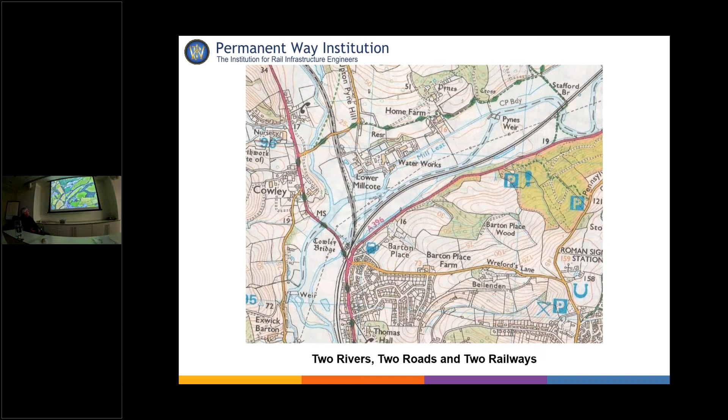In more detail, that's what we have at the moment. We have the River Exe coming down from the northwest, following the Great Western Main Line, originally the Bristol and Exeter, coming down to Cowley Bridge Junction. There's the Tarka line, coming down from Crediton and Okehampton, and then the corresponding roads which were there long before the railways, one from Crediton and the other from Stoke Canon, coming down to all meet at the famous Cowley Bridge Junction.

Present day, you have the two rivers: the River Exe, which comes down and goes through the bridge at the junction, and then the River Creedy, which comes down from Crediton down the Creedy Valley.

I was interested, it's a bit fuzzy I'm afraid on this screen, where the rivers actually ran. So I looked back at some of the old OS maps and realised that in fact the administrative boundary follows what used to be the line of the river, which is a big clue really. So I thought, well, what can I find earlier than that?

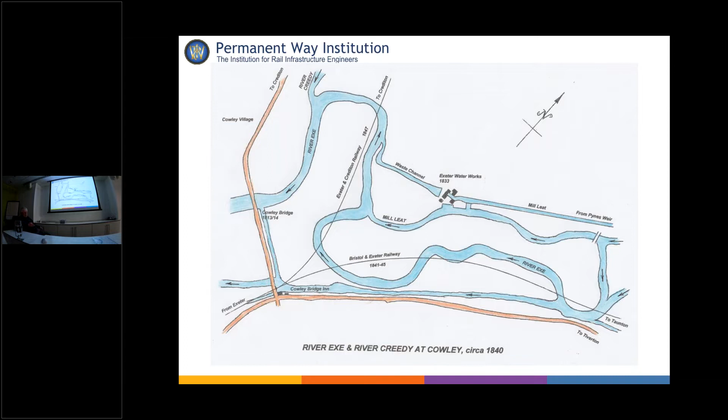You can still see, when there's a flood, where those watercourses used to run very, very clearly. These different sort of channels are clear there. They simply mimic the original courses of the rivers.

Along came the Bristol and Exeter Railway, and that was where they straightened the river, which is alleged to be the problem with all the central flooding. But there were still these bits running across floodplain over to the River Creedy, which was the original confluence, actually, the Exe and the Creedy.

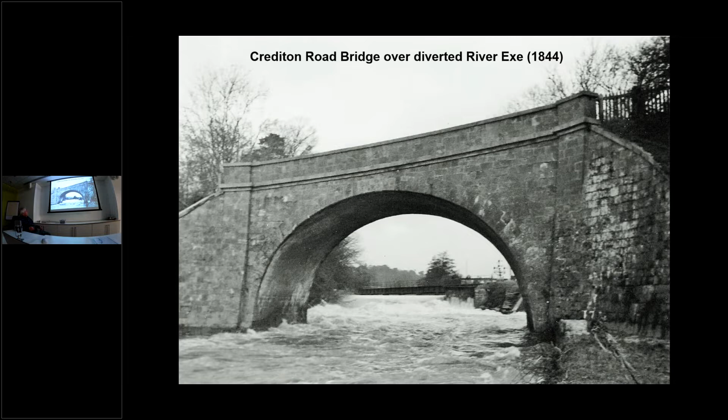Well, the next one was the Exeter and Crediton Railway. This is where it becomes really a Gilbert and Sullivan opera, with the shenanigans that went on. It was built as a broad gauge double line in 1847. There's no connection to the Bristol and Exeter Railway because they couldn't get any lease agreed.

The LSWR turned in, joined in the fray by putting in a whole load of directors, and they decided to convert it to standard gauge, hoping to connect it to their new line coming down to Exeter. Then the Gauge Commissioner said they couldn't use it as a standard gauge line because it had been authorised as a broad gauge line.

So they decided they would build a temporary station at Cowley Bridge.

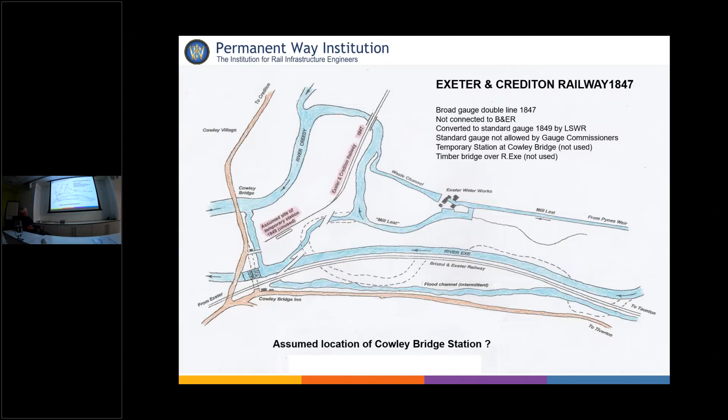When we were preparing this presentation and the video that follows it, we assumed, as I said, it was going to be in Cowley Meadows, that it would be somewhere here, possibly. We thought, well, Cowley Meadows, that's the Tarka line there. The junction's down here. We thought, well, they'd probably put it here with a nice little access here. Plus this cottage, that might be part of the station building.

But no, it wasn't, apparently. That was a new toll house that was built after the road was diverted to go over the top of the Bristol and Exeter line.

So that was the situation, but in fact, it was never used. Eventually, the Bristol and Exeter came to an agreement with the Exeter and Crediton Railway for a lease, and we finished up with the whole thing being abandoned.

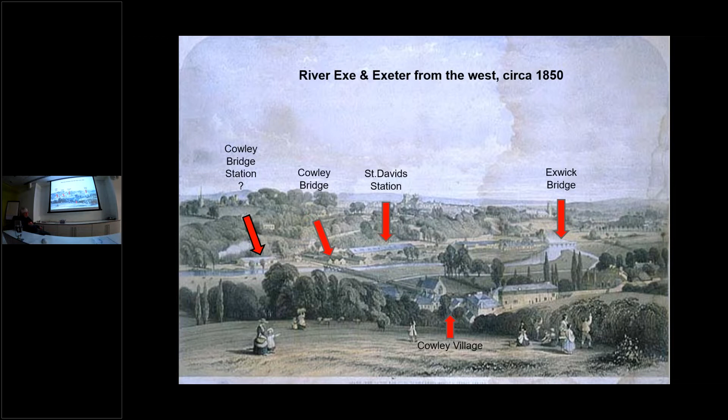And the scene isn't very different even today. So he got it more or less right.

So the Cowley Bridge booking office was taken down, but they reused it, re-erected it at a new site apparently. It was burnt down later.

So eventually, it was leased to the Bristol and Exeter. One track was converted back to broad gauge, and a junction was opened to the Bristol and Exeter Railway, initially with only one track. There was originally a timber bridge built over the River Exe, but that had become a bit decrepit. So that was then replaced with a single line bridge. It's bizarre, all this. Rather than the double line bridge.

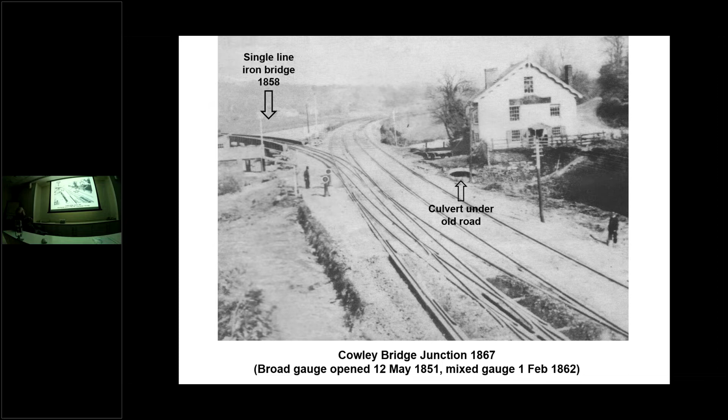There were inevitably derailments and some interesting inspectors' reports about the junction being too sharp. But eventually they got around to adding another track to the bridge and a full proper mixed gauge junction so that the LSWR could run through from Queen Street Station.

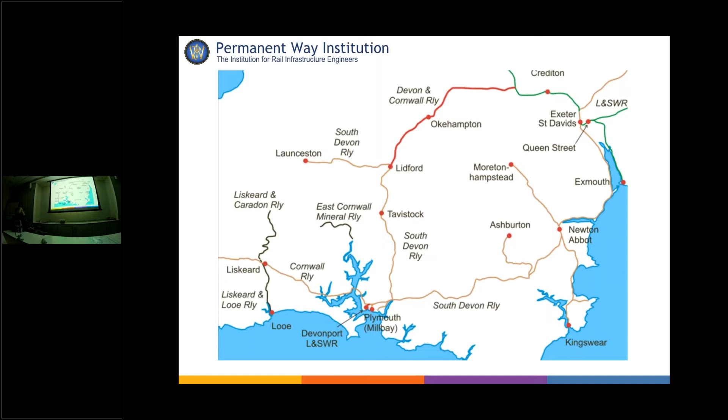And that's another rather funny photograph, a different view of the double line bridge as it was eventually finished, having been strengthened with extra trestles put underneath it. So in the end they got there, got to Crediton in mixed gauge days, and later the North Devon Line to Plymouth opened all the way through - that's where we finished with the general layout of the lines in North East Devon.

But now flooding problems - the London Evening News reported on serious flooding at Cowley and washouts at the junction. So it's quite interesting that here, presumably after the flood, you've got a P-way gang here.

Relaying track, chaps doing something about the embankment, a relaying train, perhaps very primitive - quite an interesting picture. But unfortunately the artist wasn't very good at representing the single line bridge over the floodplain here, it looks more like a fence. And it looks like the landowners planted some nice little trees, with fences round against the rabbits. A lovely picture.

But the problem was that the only outlet for water coming down on the right-hand side of the line was this small culvert, which the Bristol and Exeter had built just north of the junction, an 8-foot span, still there of course. And that's all there was to relieve the flooding, which was mainly overtopping the railway up the line, coming down this side.

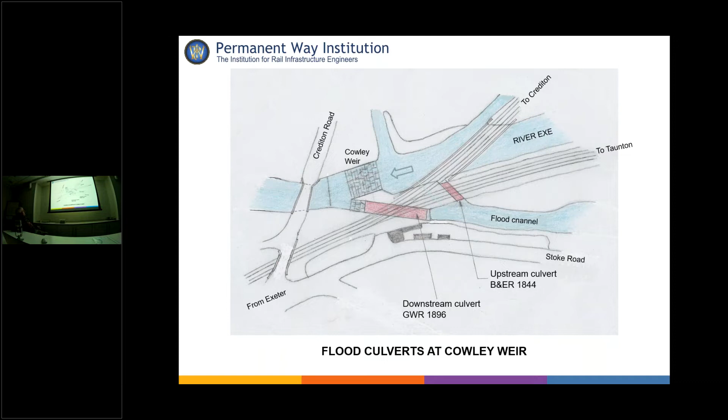This little old small flood culvert here coming out under the bridge of the line to Crediton, but an extra one had been added in 1896 by the Great Western to try to get the water away more quickly - that's known as the downstream culvert. The old one was the upstream culvert, and Mark very kindly provided me with a photograph actually inside the downstream culvert, which was a lot bigger than the old culvert.

So those were the typical 20th century winter flood conditions, which continued right the way through from that 1896 extra culvert, and that was still pertaining at the beginning of the 60s.

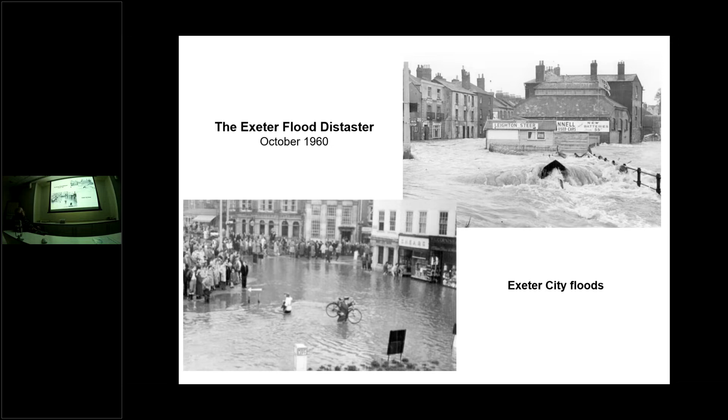But then October 1960, there was the Exeter flood disaster. It really was horrendous - this is the state things were in the centre of Exeter. That was the flooding downstream from Cowley. It was just a complete ocean.

A report was commissioned from MacDonald and Partners by the Devon River Board to report on what could be done to alleviate the flooding. Part of that was proposals for realigning the River Exe at Cowley, and various options were considered.

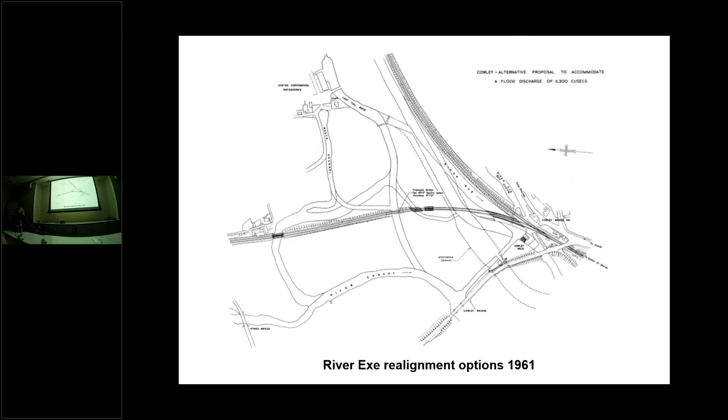I won't go into detail, but there were alternatives. That was the one eventually adopted, with the Exe alongside the railway diverging away from the railway, but back under the original course.

Sorry, I'm pressing the wrong button here again. I've done it again. I've done something silly with the buttons. Sorry Philip - that's all right, don't worry. There's all this technology. All right, do that, and that should be started. All right, okay.

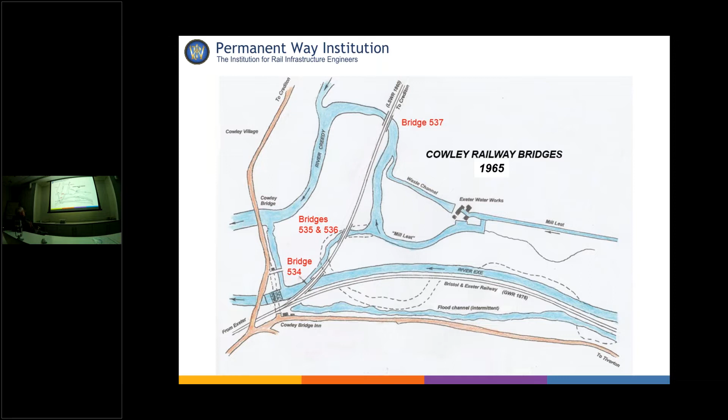So that's where we were by 1965. We had double line bridges from the junction, Bridge 534, the old long wrought iron bridge, and all these other various bridges which were getting very ancient. So it was decided

that British Railways would do the work to replace them with new bridges on the alignment proposed in the McDonald report. A new one for the River Exe, filling in the old channels, a new one for the Mill Leet coming from the waterworks, a connecting accommodation bridge, and a balancing channel between the two - a nice new wide channel.

And that is actually what finally - sorry, I've done it again. I keep pressing the wrong bloody button. Just take the slide up on the screen, the forward one. Yeah, right, there you go - go backwards now.

In those days it had become British Railways rather than British Transport Commission. It was Southern Region, so they engaged consultants, Mott Hay Anderson, to carry out the design work, because they didn't do that sort of thing very much in the Southern Region in those days. They invited tenders in early '65, and let a contract for construction to Kier Construction. Then in June, the North Devon lines were transferred to the Western Region.

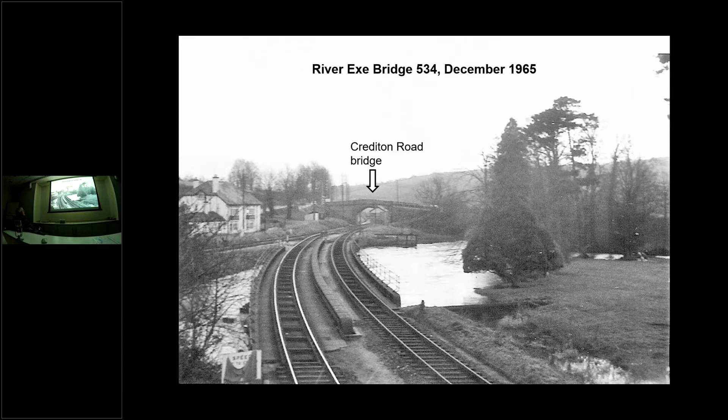The downline had been filled with stone dust to create a contractor's road, and the upline from Crediton to Exeter was singled so that we could carry out the work with just single line working.

Interestingly - have I done it again? No. The original course of the River Exe is actually visible here in this photograph, along with the singled upline and stone dust infill to create a road. The original course of the River Exe here again, snaking around under the bridge.

This is these two bridges - close to this was where the gents' lavatory was. Fortunately, all these bridges were two separate bridges because the line had been doubled at different times, which made it a lot easier for the work to be carried out, being able to demolish one side without affecting the other. Also for infilling, it meant the longitudinal rail bearers could carry the load of the contractor's vehicles and so on.

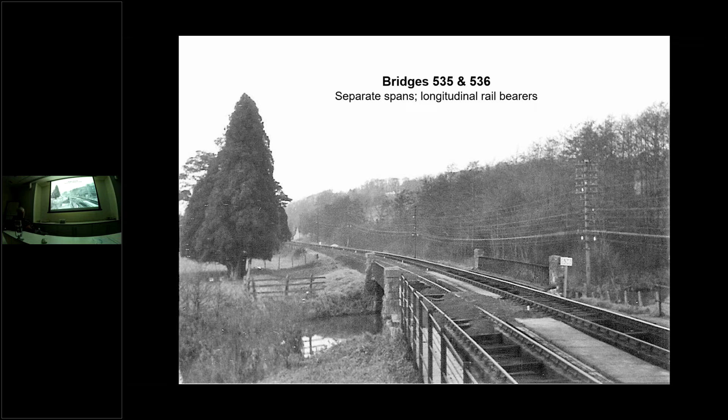That was the one, the furthest north, the Mill Leet. Again, you can see quite clearly before construction there, and also wagons standing on the contractor's siding.

So that was our site. It was over half a mile long, 700 meters, single line, not very easy for major civil engineering works for bridge renewal, but we managed, and it turned out to be quite an interesting job.

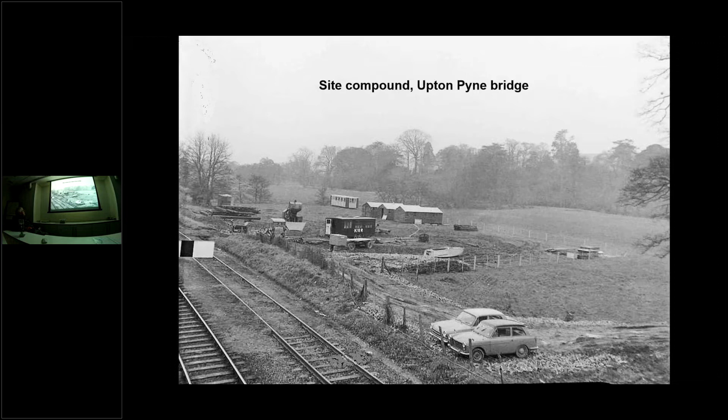That was a contractor's access road, a bit further into the job, got a bit muddy. Oh, and very handy, the Cowley Bridge Inn, we had some temporary accommodation.

The Martin Hayes Clerk of Works decided to negotiate with the landlord to level a piece of ground and create an access off the Stoke Road. A few loads of stone from the contractor and a tracked excavator managed that.

And so he suggested, well, why don't you get a caravan as well, save on lodgings? Strange enough, we both got caravans almost exactly the same. Very convenient. All the facilities were there, you know, loo in the backyard, and yeah, enough said. It looks a bit different today.

So we started eventually in February. Diesel pile hammer, banging in piles, during night possessions - not very acceptable, so there were lots of complaints.

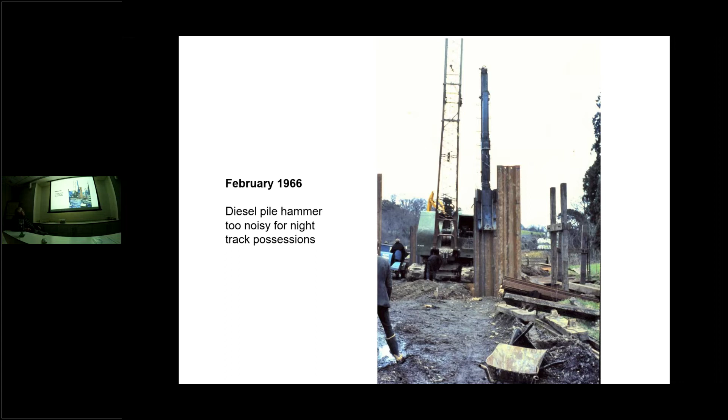So we finished up doing Sunday possessions instead. Some of the piles were so close to the line, we actually had to tip the rails out to get the piles in, pull the sleepers back. That's me there. Then get the track back together and ready for Monday morning.

The cofferdam excavation is going on here. Oh, that's Kier's site engineer - not very interested in the work, I don't think. He's a nice chap though.

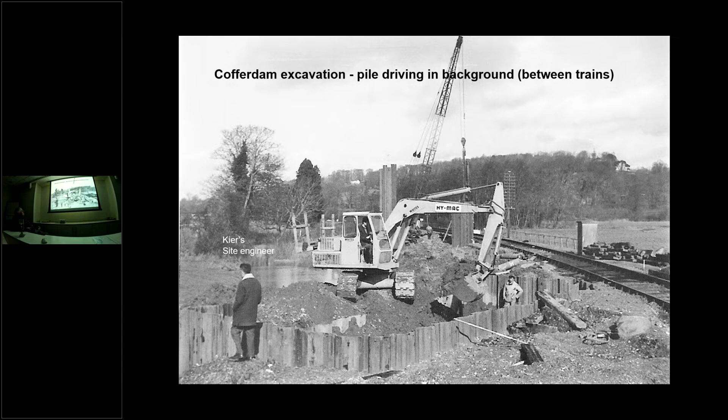The excavation continued with 5 miles an hour working. That's a Plymouth to Brighton service, and there's the excavator busying away. No problems, you know, so everybody's happy. Don't think we'd get away with that these days.

Cofferdams are dug, the strutting and framing in. Then one of the cofferdams got to about 6 meters down, and there's this huge tree trunk, about 1.5 meters in diameter. How long it had been there, how many hundreds of years, I don't know, but it might have been thousands of years. That took 2 or 3 days to cut through and get it out, because every time you cut a slot in it, it closed up because it was expanding.

I don't know what they did with the tree trunk. I'm sure the local archaeologists would have stopped all work for about three weeks to examine it. But anyway, we got the cofferdams completed, some very close to the line, with a passing DMU over the top. It all worked, and nothing fell in.

All the concrete for the job was batched on site. They used no ready mix at all - they set up a proper batching plant and so on for it.

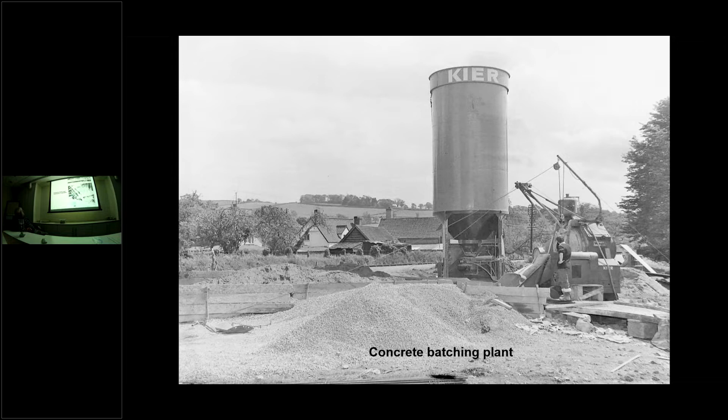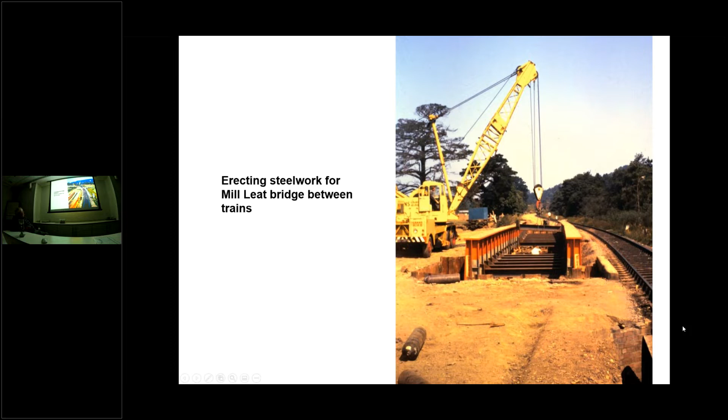The steel was erected between trains, and well, there's a Hymac going past on the ballast train whilst work has paused up on the Mill Leat Bridge.

Keep doing this. What do I do? Yeah.

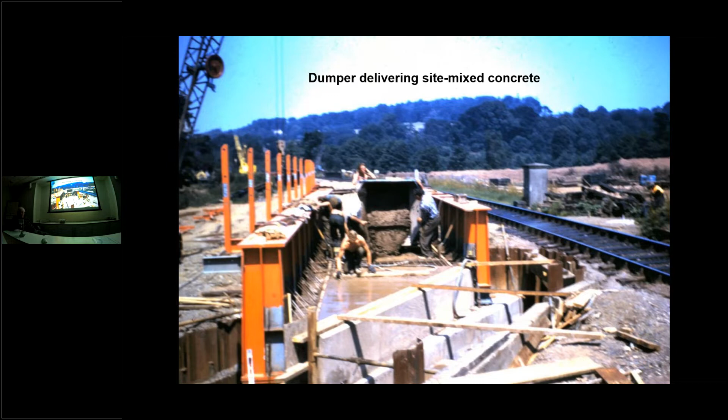Concreting the deck of the River Exe Bridge. Note the PPE, health and safety - nobody got hurt, but it was a lovely sunny day.

Eventually the bridge decks and the formation were ready for track laying. It looks a bit primitive through here, but it was okay. There was a single line turnout laid beyond the Mill Leat Bridge.

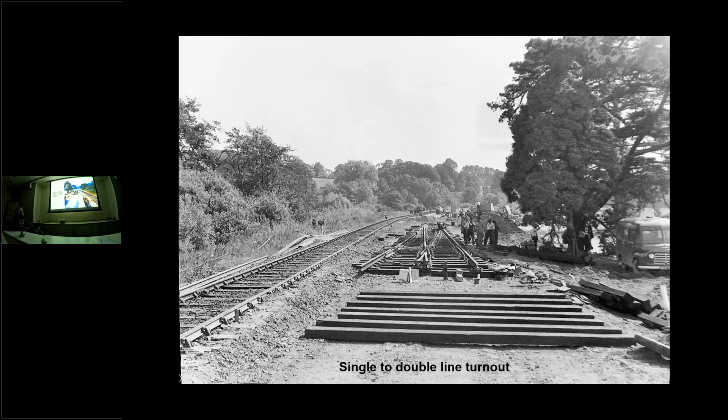Eventually it was connected - initially back into the up line, so that whilst we were finishing the work, trains could continue to come down the single line connection from just beyond the bridge. There was a temporary ground frame beyond Upton Pyne Bridge, where trains went from double to single line working, so they could continue to use the single line and then come back onto the new down line until the work was finished.

So the new track was laid and ballasted, and opened for use. Then we could take out the old up line, which was lifted and got rid of - which, oh, it's quite interesting.

Both bridges were double span, so of course the two spans had to have different skews to suit the track curvature. That was fairly tricky where the joint between the two spans was.

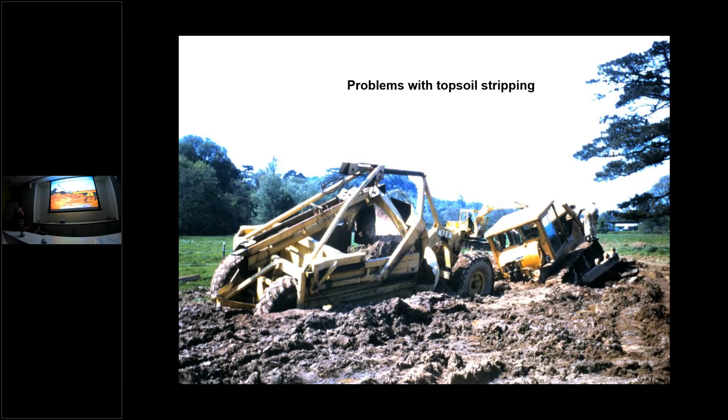But eventually we got around to digging the new channels. The spoil was moved by dragline and carted away by six-wheel drive dumpers. They had to have six-wheel drive because they kept bogging down otherwise.

So we dug out under the bridges, pulled out the sheet piling, and the River Exe channel was dug.

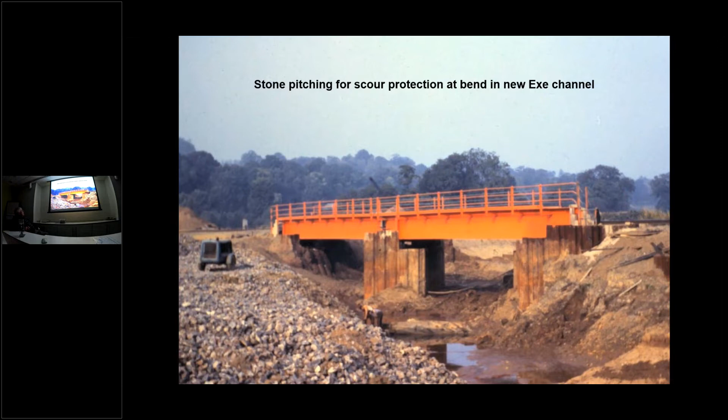Stone pitching was required for the bend in the River Exe to prevent the scour, and that was completed - a nice job, all pitched by hand, as required by the Devon River Authority. They wouldn't tell us what they wanted; they said, well, you do it and we'll approve it. But yeah, typical.

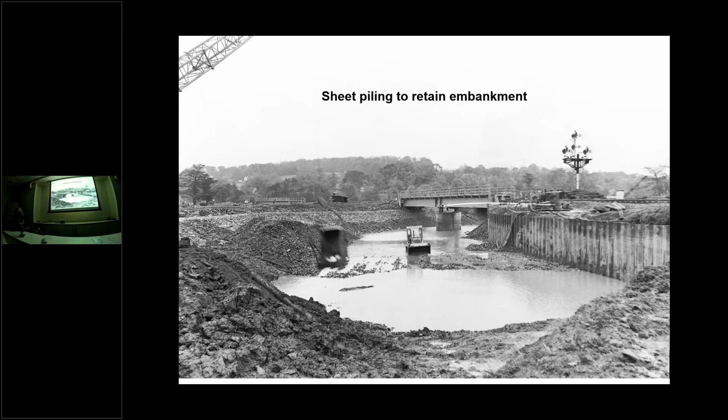Sheet piling was driven to retain the embankment downstream of the bridge. And then there was the problem of the water main.

There were existing twin water mains that ran from the waterworks down to Crediton Road. Unfortunately, the existing mains ran straight across where the new cut for the River Exe was due to be. We were held up because there was a delay on the delivery of the pipes for the water main.

We were very pushed because all the excavated topsoil from the new channels had been stacked, ready to go into the old channels. That had to be got rid of by the end of October before the flood season, so it was all a bit of a rush.

But eventually we got the water mains diversion done. This is rather out of the normal realm of railway civil engineering - 18-inch, or 450 millimeter, twin high pressure water mains, 500 meters of it were laid.

I'm sorry, I keep doing this - I keep getting the wrong button.

Where the mains went under the railway, they rather cleverly used the old piers of the dry span bridge 535.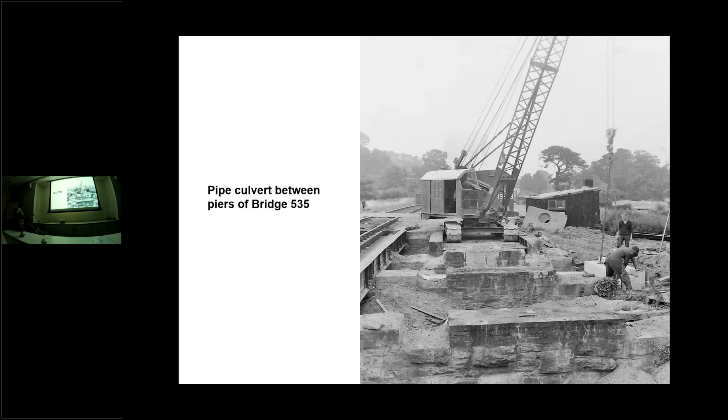There were thrust blocks needed at all the turns and so on because of the high pressure. That's the finished pipe culvert under the existing line.

A new pipe crossing over the balancing channel next to Crediton Road. And that's which was the - god, sorry, I keep doing it.

The little cottage that we thought might have been part of the station, but in fact that was the toll house, not the station building.

And that's where we sort of finished up - we also had to build two accommodation bridges over the new cut to connect the fields, one there, one there. And there was also a flap valve here to stop backflow into the water mains, into the waterworks.

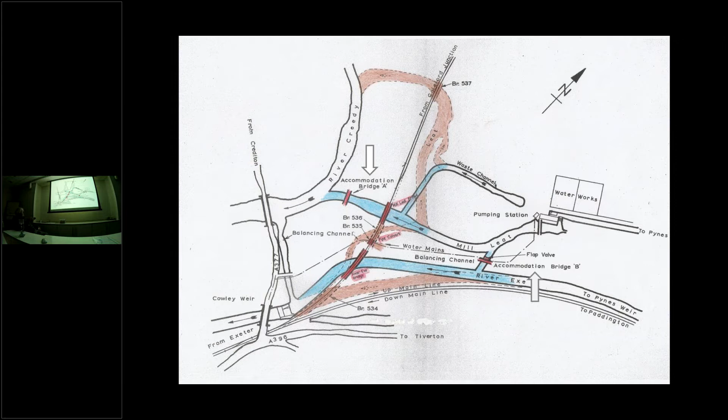There was a flap valve channel, and the water mains were carried on the accommodation bridge - that's the one downstream of Mill Leat. Enormous span, but it worked.

And that's the one over the balancing channel, with the flap valve channel here, and the brackets to accommodate the water mains.

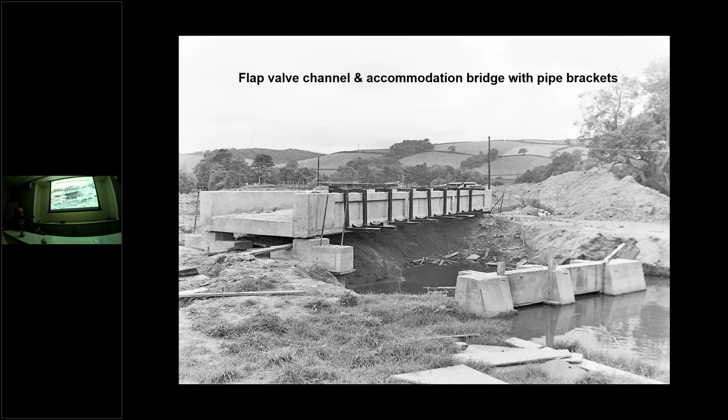Before we could fill the old channels, we had to dewater them, with 4-inch pumps running 24 hours a day to keep the old channels dry. Pumping them out, we had to return the fish to the river, most of them - there was quite a lot of fresh salmon on the local restaurant menu for a couple of weeks.

But we got there in the end. In order to fill in the old channels, we had to erect Bailey bridges over the new channels to get to where the fill had to be brought in.

In fact we had to bring in an extra 25,000 cubic meters of fill to actually fill in the old channels, and that's the old Exe channel being filled with the accommodation bridge giving us access.

So yeah, those are the Bailey bridges. It was interesting - this is the photograph I offered to you, Malcolm, to identify.

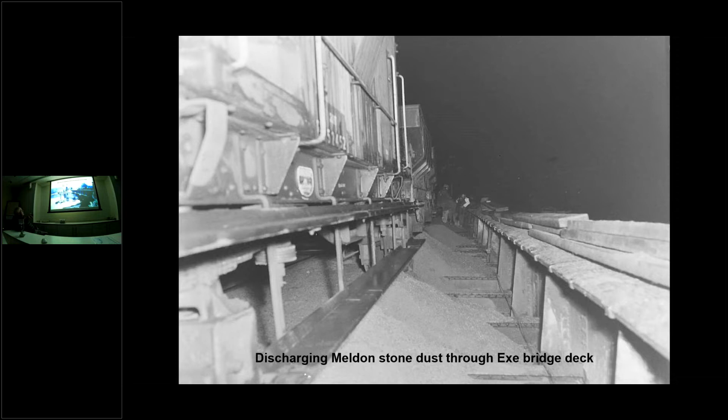Eventually we were able to fill up the channel by discharging stone dust through the deck. Fortunately, with the cross girders having taken up the decking, we were able to do it. And as we went along, the sheet piling was driven to retain the stone dust.

Again, some quite interesting health and safety going on here. We did have a safety boat in case anybody fell in, but nobody got wet.

So eventually we got that filled in. You can see the stone dust fill here, and demolished the old upside span. You can see these - you couldn't demolish these, they were full of concrete. And these are the extra strengthening that was put in the early 20th century, the additional trestles.

But before we could - sorry, I keep doing this. Oh, press the wrong button. Have I? Should be all right.

Oh, there we go. We had to extend the upstream culvert because that discharged under the old bridge. So that was another piece of interesting work - a precast concrete box culvert to extend it.

I can't remember quite how we cut through the sheet piling without everybody getting wet. I can't remember how that was done, but it was achieved anyway.

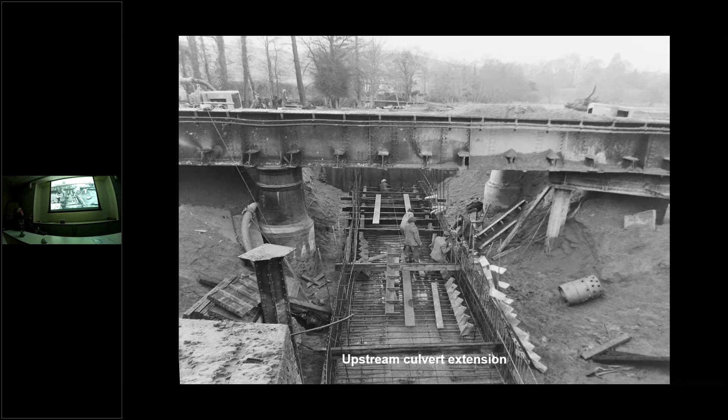So that was the old downline span - the upline span had disappeared, the upline track was waiting removal. The formation was topped up again at night with stone dust, and the cross girders were cut away, disconnected from the main girders. You can actually see the guy here with an oxyacetylene torch.

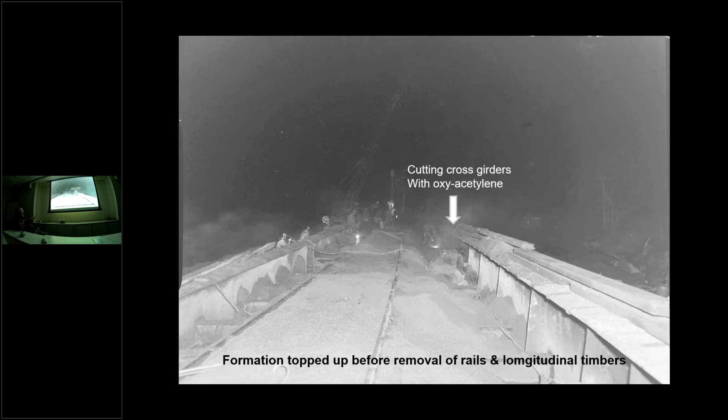Bear in mind this steel was coated in tar and salt - God knows, the smoke was still horrendous, but I don't know whether this guy is still alive. The cross girders were actually left in the formation because there's no way of getting them out.

So the main girders were removed, carried away by rail, and the plain line completed, and the contractor siding was removed, and the double line was restored - that was 1967, all nicely, neatly done. The contractor's compound was all nicely topsoiled and reinstated, and that was the finished view from Cowley Bridge, all very neat and tidy, but a little bit different from today. I don't know why all that stuff grows, but it's amazing, isn't it?

So that was the situation by 1970, where we had the single to double line junction just north of the Mill Leat Bridge, the replacement bridges, the old bridge filled in, the new River Exe Bridge, which is of course the one that's there now. The River Exe diverted away from the old line, a balancing channel, diverted Mill Leat and so on, and a single line junction at Cowley Bridge.

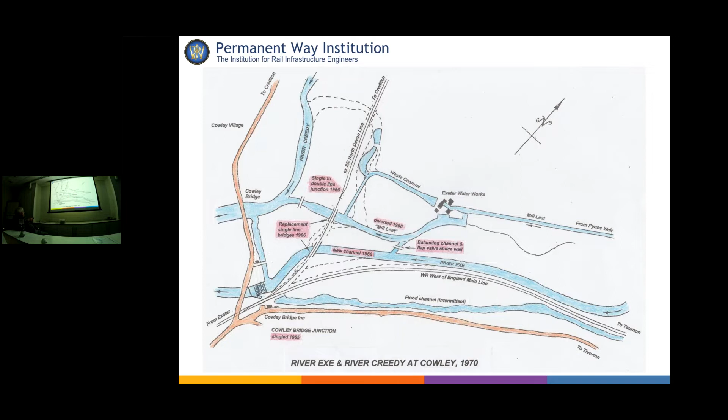But then they decided that still wasn't good enough - they wanted to do more improvements at Cowley Bridge. So Hydraulics Research were commissioned to do another study at Cowley. They built a model at Wallingford, just near where I live, and they modelled it.

There's Cowley Bridge, you just see the little arches. It's Cowley Bridge Junction with a line going off to Taunton, that's the Crediton line, and these are the rivers going down to Exeter Weir and so on. And they finished up recommending some more river works, all quite elaborate.

Berms alongside the river channels. The Mill-Leat channel being widened out and connected directly into the River Exe, rather than all this business for a balancing channel. The accommodation bridges removed and widened and replaced.

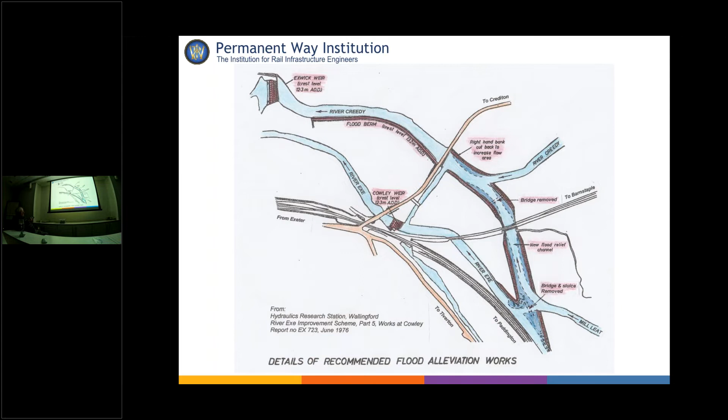They wanted to change the crest levels and weirs. It was all very elaborate, when in fact it wasn't all done. What was done was simply to create a much wider flood channel, taking advantage of the much wider spans of the new Mill Leat Bridge, the 1965 bridge, and replacing the old accommodation bridges with some more new ones, much closer to the railway line.

And I don't quite know what happened to the water mains diversion, but they must have done work here as well. So that sort of brings us more up to where we are now. And that's one of the new accommodation bridges over the wider Mill Leat Channel.

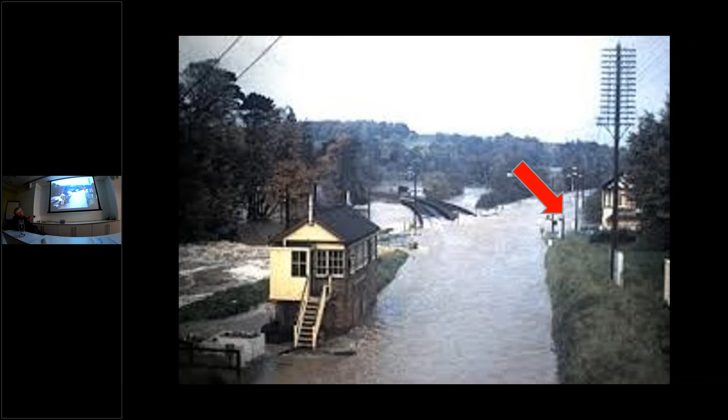But there are still the problems of the water flowing down the wrong side of the line. Still hadn't been sorted. Pretty flooded this side, but completely over the top of the junction, which has always been the problem.

And of course, the problem was at Stafford Bridge, and it's Stafford Bridge, not Stafford's Bridge, I might say. And that's the original timber trestle bridge, which was built by the Bristol and Exeter, replaced by steel bridge in 1905.

And the problem, of course, was the water overflowing the flood banks here at Stafford Bridge when it got to a certain level, coming down the wrong side and overwhelming the junction.

The flood banks at Stafford Bridge, they've recently been repaired and raised back to their proper level.

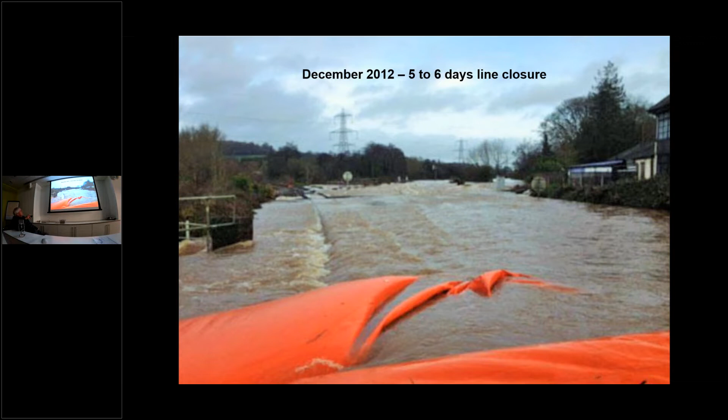But unfortunately, December 2012, as you all remember, we had this massive flood, because once the water gets to a certain level, it can't be allowed to go above the bottom flanges of Stafford Bridge, because of bridge stability. So it has to flow down the wrong side of the line. And so that's where we had the Aquadam, inflatable barriers and so on, and all a bit of a disaster.

So it's quite apparent that the existing culverts that we have, the old upstream and downstream culverts, are over here. There were some pipe culverts which were put in, you can barely see them. That's what they looked like last summer. They were put in around 2000, I think it was, just here, just about to see them in the aerial photo.

They obviously couldn't cope, so this is where the new box culverts were decided to be built, which you've probably read about. So in 2018, a 75-hour blockade - I think it was pretty good to do this in 3 days.

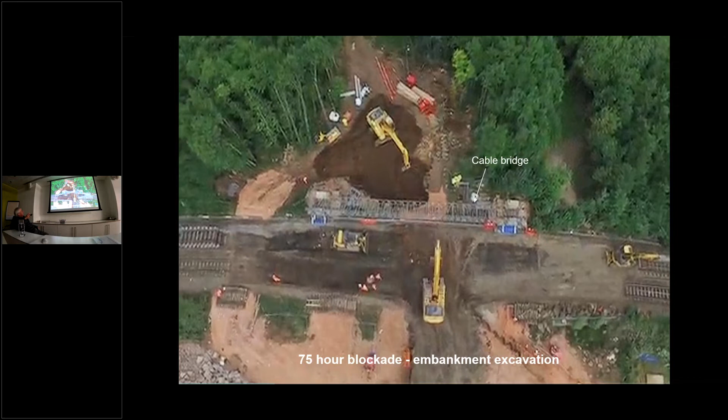The line was closed, embankment excavated away, stone backfill for the culvert foundations because the ground wasn't very good there. I'll come to that in a bit.

Box units imported from Westmeath in Southern Ireland. God knows why, but there we are. Very good job - Shay Murtagh, they were called.

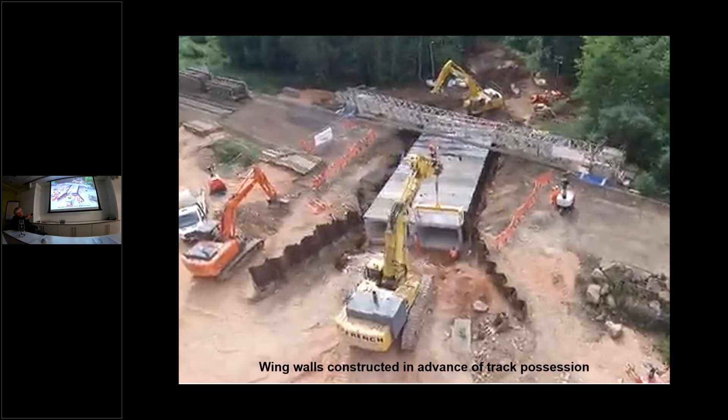Wing walls, they were constructed before the track possession, so all they had to do was dig out, drop the culverts in, that's all. And those are the completed culverts. Track was put back - only took 75 hours. I think they're getting pretty good at this stuff.

Aprons and rock mattresses upstream, that was specially designed to stop scour, spillway into the River Exe, and there's the Tarka Line Bridge, the one we built in '66.

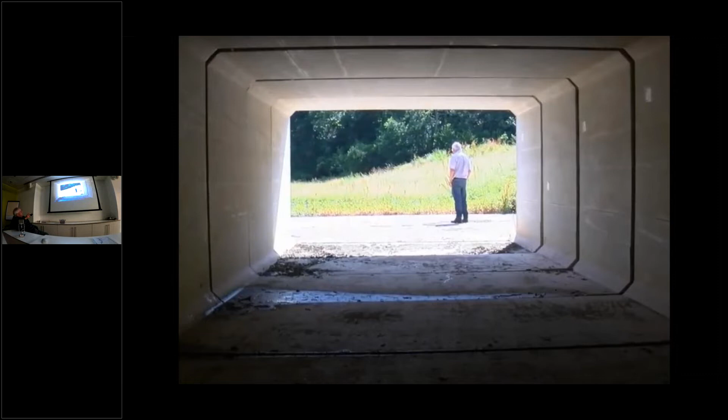And that's the completed culvert. Very nice job, quite big they are. Give you an idea - that was me having walked through and back from them.

But the interesting thing is you can actually see from the aerial photographs, in the crop marks, the original course of the River Exe. Where does it come? Right to where the culverts are. So it's not really surprising that they had bad ground here. They chose exactly the right place to put them, but they had a lot of problem with the ground.

At Stafford Bridge, they've instituted a river level monitoring installation so that they can get prior warning, rather than having to have a watchman out there, prior warning when the river levels are getting dodgy.

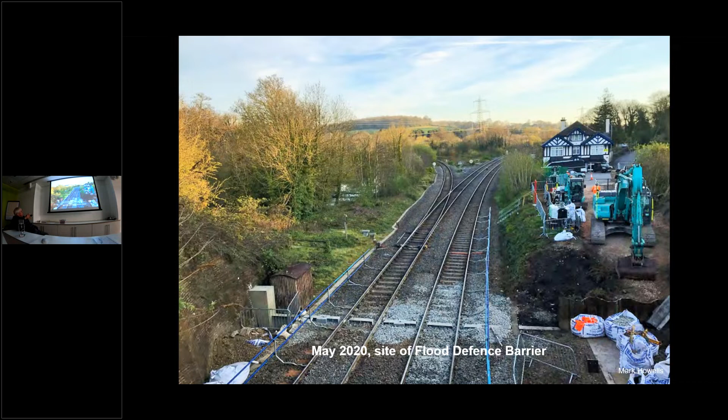And then, of course, this is Mark Howells' defence barrier scheme, which was put in 2020 to mitigate the problems of future flood barriers. There's a flood defence barrier erected. And since then, all these extra things have been put in.

The electrical signaling equipment has been raised above flood level, improved the track stability. They've got the emergency ballast stockpile at Riverside Yard - which incidentally, I added 3 tracks to that as another contract whilst I was down at Exeter doing the Cowley Bridge work. Well, that was another bicycle job.

And then, well, contingency plans.

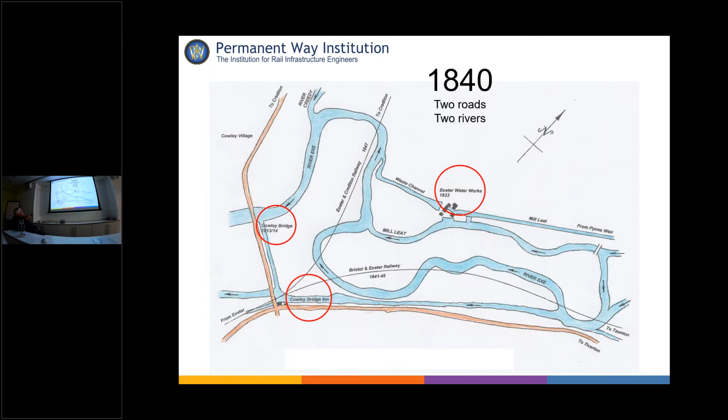So in 1840, we had 2 roads, 2 rivers, and no railways. But now we've got 2 rivers, 2 roads and 2 railways. Cowley Bridge is still there, that hasn't changed at all. Exeter Waterworks has changed quite substantially. And of course, the dear old Cowley Bridge Inn, still there but just about recognisable - afraid it's closed now, it's a shame. So that was Cowley Bridge Junction. Is that a scene from the past, or is there more to come?

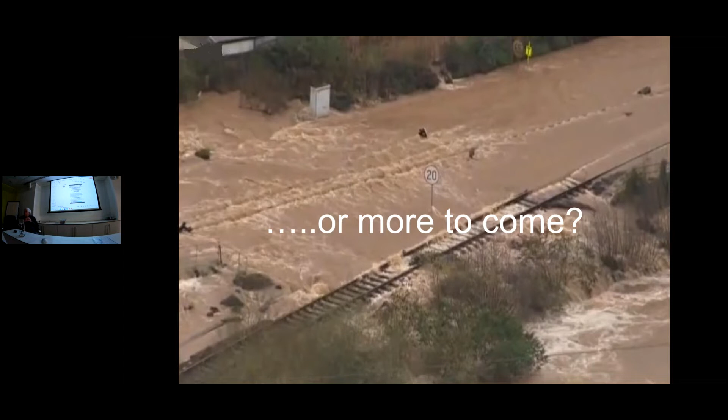So it was just left to take possession when we needed it. I would go up to the signal box, do the usuals, see the levers are on the handles, the sleeves are on the handles, and it all worked very smoothly. There was no signing of - well, yes, you'd sign the train register - but things were done properly, without a great deal of administration and form filling and side covering, quite honestly. And it just all worked. We all worked together because the people doing the engineering understood the operating, and the operating people understood the engineering side of things. So it all worked very, very smoothly. I don't remember there ever being any problems.

Whilst we were doing the infilling of the Exe Bridge with the train of hopper wagons and so on, periodically, because the tail of the train was hanging over the junction, we had to pull clear because the night mail was due. So the signalman would wander up the line from the box and say, night mail's due in 20 minutes, can you pull up? So, okay, pull up, clear it, and he would let the train through. It was as simple as that. And then, once that was done, I'd go down to the box to see the train through and say, right, you can take the road again.

I think it's fair to say we could learn a lot from that, and not make things simpler but overcomplicate things. So I was hoping that's the answer you were going to give. Reassuring that we've done it before. Yes, do it again. Thank you.

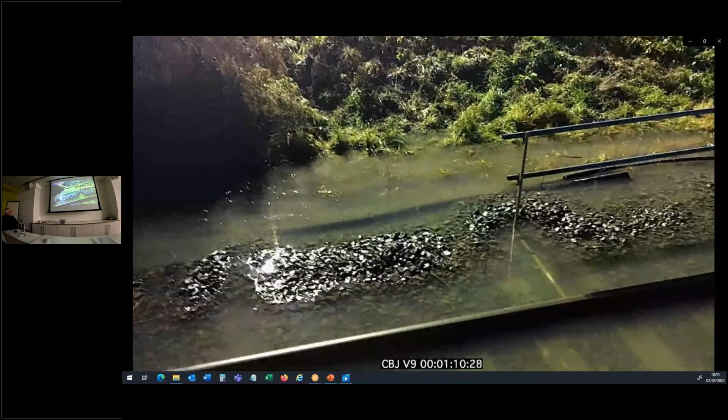Often the floods would rise over the line, washing out the ballast and damaging line-side equipment. With the increasing risk of flooding and the line closures which resulted, something had to be done to limit the frequency of these events and improve the resilience of the railway against flood damage. This programme will discuss the changes made to the rivers at Cowley and the measures put in place since the disastrous Exeter City floods of December 1960 and subsequent flood events.

Richard Watts was the BR Western Region resident engineer on site during work carried out in the mid-1960s to reduce the effect of the seasonal rise in water levels. Although this project was essentially a bridge replacement scheme, the river's course was the key driver to the direction of this project.

The course of the River Exe before the railways came was nowhere near where it is now. It used to meander across the floodplain at Cowley and then join the River Creedy north of where it joins it now, and then flow through the three-spanned Cowley Bridge behind me here, which gives the area its name, built in 1813 or 14, long before the railways.

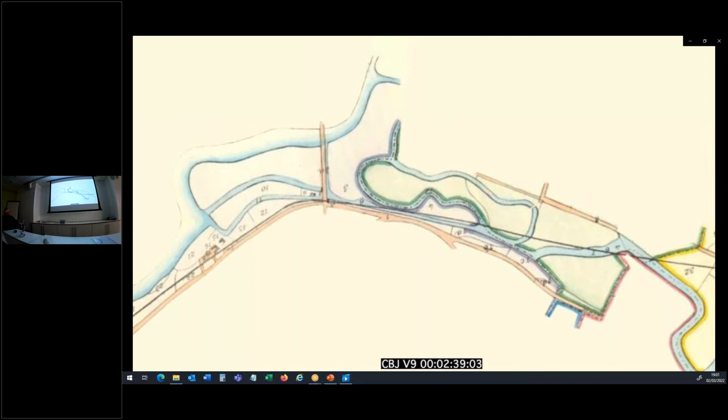The 1836 Bristol and Exeter Parliamentary Plan shows where the River Exe and subsidiary watercourses ran in the early 19th century. On the 1900 Ordnance Survey, the city boundary line, highlighted in red, still followed the original course of the river. When the Bristol and Exeter was built, they diverted the Exe to run on the northwest side of the new railway for about 1 kilometre. They also constructed Cowley Weir, a balancing channel from above the weir to Cowley Bridge, a widened channel southwest to join the original main river, and the Brunel Arch Bridge over it to carry the Crediton Road, which had to be realigned and raised to suit.

The North Devon line was completed in 1847 by the Exeter and Crediton Railway Company as a double line with broad gauge track of 7 feet and a quarter inch, that's over 2 meters wide. The only example of broad gauge track with signals, locomotives and rolling stock nowadays is at Didcot Railway Centre in Oxfordshire, who very kindly let us visit as they prepared for their annual events just before Christmas.

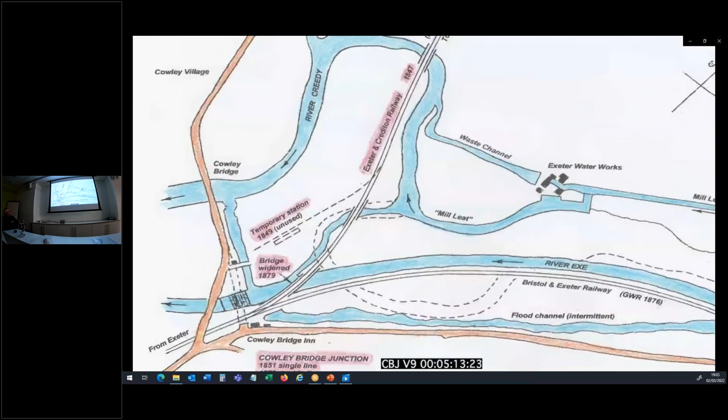Eventually, the railway was opened in May 1851, operated by the Bristol and Exeter, with one track converted back to broad gauge and a single line junction at Cowley later converted to double line. The temporary wooden station was dismantled and re-erected at Newton St Cyres.

Finally, in 1860, the LSWR reached an agreement with the Bristol and Exeter for a connection from its Queen Street station, now Exeter Central, to St David's, with mixed gauge track from there to Cowley Bridge Junction, and a lease of the line to Crediton and onwards to the North Devon Railway and Barnstaple.

The LSWR line crossed the Exe immediately north of Cowley Bridge Junction on a curved multi-span wrought iron bridge 75 metres long, which was widened to 2 tracks in 1879. North of this, across the floodplain, were 3 other bridges. These spanned the original course of the River Exe and a flood opening next to it, and a bridge over the Mill Leat about 650 metres north of the junction.

The railways began to experience problems from seasonal flooding, and in January 1886 the Illustrated London News reported major disruption at Cowley Bridge. Following the construction of the Bristol and Exeter, there was a tendency in times of flood for water to flow down towards Cowley Bridge Junction on the east side of the railway. A culvert through the embankment that had been built upstream of Cowley Weir proved too small, so it was augmented by the GWR in 1896 by a larger culvert downstream of the weir. Often these culverts would be insufficient, causing floodwater to overtop the embankment and severely disrupt train services.

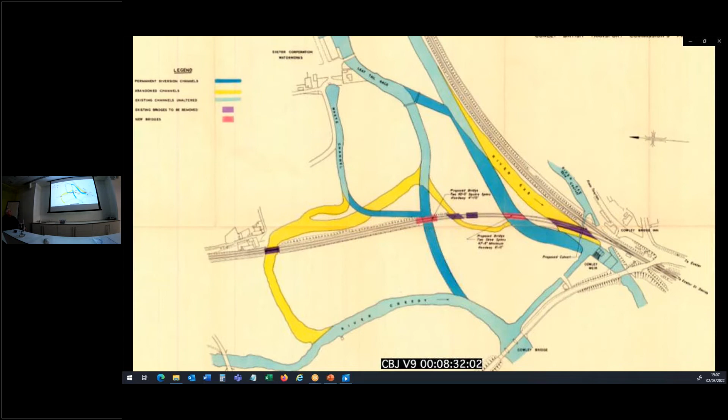By the early 1960s, the railways and the rivers at Cowley had changed little for over 100 years. But the 4 bridges north of Cowley Bridge Junction on the Barnstaple line required reconstruction or replacement. After the Exeter floods of December 1960, a flood relief scheme at Cowley was developed by the Devon River Board and the British Transport Commission, following proposals by consultants MacDonald and Partners in November 1961.

2 new double-line bridges would replace the 4 bridges, with diversions of the watercourses to improve the flow of the River Exe and protect the waterworks installations, which had come to within 60 millimetres of danger level during the flooding.

The proposals were completed by December 1962, but an earlier Transport Act had created the new British Railways Board in 1963, and there followed the infamous Beeching Report. At first, the North Devon lines were threatened with complete closure, but following much opposition, the Barnstaple line was reprieved. The Plymouth route also survived, but eventually closed beyond Meldon Quarry in 1968.

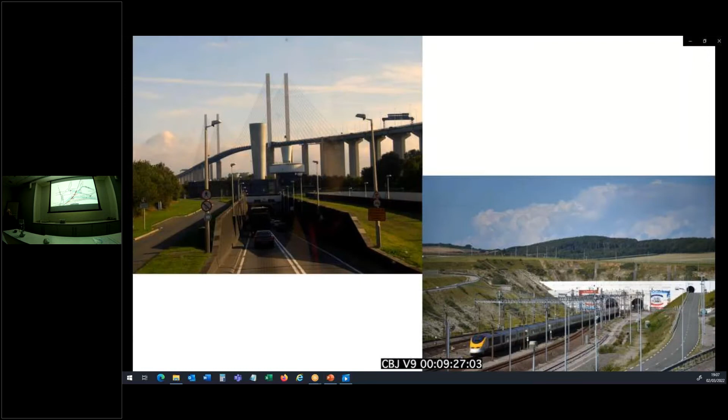To save costs, it was decided to single the line and the new bridges for approximately 500 metres from the junction. Detailed design was carried out by Mott Hay and Anderson for British Railways Southern Region, and a contract was let to Kier Construction.

But before work could commence, the North Devon line was transferred to the Western Region. So for continuity, the contract was supervised by Mott Hay, with a Western Region resident engineer responsible for the railway engineering and operating aspects.

Work started late 1965. The up line towards Exeter had been singled for 800 metres, so that the new bridges could be built on the down line, which was converted into a temporary contractor's siding.

A temporary signal cabin just north of Upton Pyne Overbridge controlled the connections back into the double track and into the contractor's siding. The contractor rented the adjacent field for his compound, and a convenient site for the resident engineer and clerk of works living caravans was provided at the Cowley Bridge Inn by Don and Kath Hooper, who made the workers very welcome.

The down line was spread up to rail level with stone dust delivered by train from Meldon Quarry to provide an access road throughout the site from the contractor's compound.

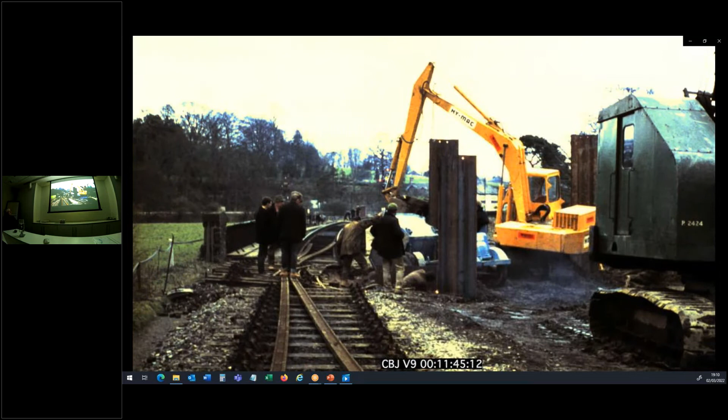In places this involved tipping out the rails and pulling back the sleepers, but after noise complaints this was changed to Sunday daytime closures for driving the piles closest to the line.

The remainder were driven during weekdays between trains, and the cofferdams were excavated using back-actors and grabs, with framing and strutting fixed as excavation progressed.

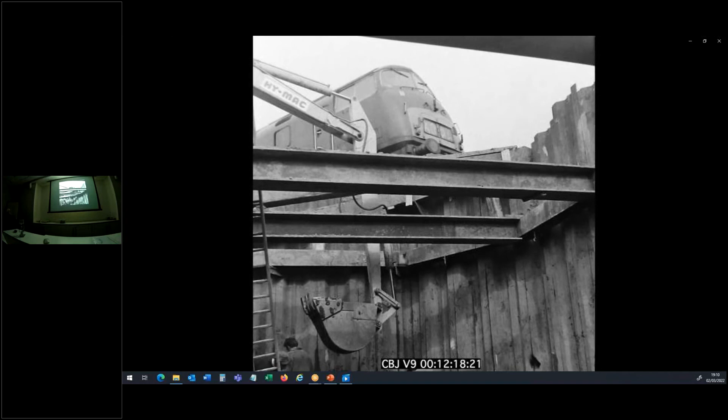The cofferdams were up to 7 metres deep, excavated into the shale bedrock and continuously dewatered using diesel pumps, not always successfully. Where track sleepers had been trimmed to accommodate the piles, passing trains overhung the excavations.

At the bottom of one of the cofferdams, a large tree trunk was found, needing several days to cut through the saturated timber and lift it out by crane.

A mixing plant in the site compound produced all the concrete for the new abutments and piers in the cofferdams, and it was transported by dumper trucks using the temporary access road alongside the running line. Trains were limited to 5 miles an hour and vehicles would stop when they were passing.

Steelwork for the bridge spans was fabricated by Red Hugh Engineering at their works in Water Lane near Exeter St Thomas Station. Robert Hopkins started his career as an apprentice with Red Hughes in 1966, the year work began on the bridges. It was heavy stuff, and it was an eye-opener, from leaving metalwork at school to this, and the bridges - I'd never seen anything made like that in my life.

After the steel was delivered, you used to have a hell of a job getting it out of there on these corners. When it was big, long stuff, the police would put up signs and warn everybody in the street they were going to back out and then drive up the road. And a few times, a lady from that Cowick Street laid in front of the vehicles. They wouldn't let them in, wouldn't let them out, and we had some fun then, and everybody came outside and looked and laughed and clapped, and that was it. That's how it went.

Were you involved in the actual erection of the steelwork at Cowley? No, that was a special job - I was too young at the time. But we used to go to college one day a week, day release.

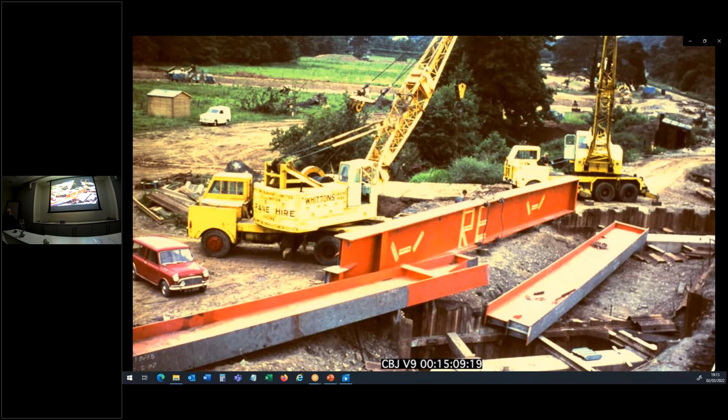Steelwork was delivered by road, and the bridge components were brought in across the field from the Crediton Road. Works to install the steelwork had to pause between trains, and as you can see here, a ballast train from Meldon Quarry approaches the Mill Leat Bridge.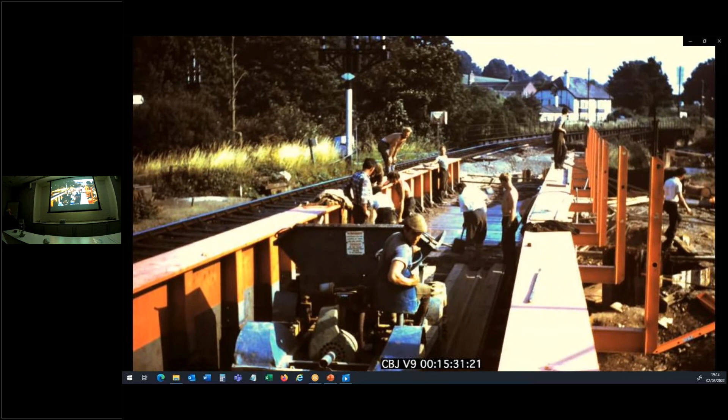After the steelwork had been erected, the reinforced concrete bridge decks were cast in situ. The decks were then waterproofed, bridges 535 and 536 were removed and filled in, and the formation prepared for the new single line. This is the bridge on the Barnstaple line that we built over the Mill Leat.

It's a few hundred yards north of Cowley Bridge Junction. Looking a bit tatty, it doesn't look as if it's been painted since we built it 55 years ago. But it's still there, and the piers look okay. Can't see the abutments very well, but it seems to have survived. So the engineering did a fairly good job, I think.

A single to double line turnout had been installed just north of the Mill Leat Bridge, so that the new track could be laid in over the completed structures, with a temporary connection back into the up line.

Fred Butler was a member of the crew on the first train one Sunday morning in August. They went out on the old line with an excursion to Barnstaple hauled by a Hymek diesel loco driven by Walt Thomas. On the way back, they were warned by Ernie Barryball, the ballast train driver, that they'd have a rough ride over the newly ballasted track and the two new bridges. The track had only just been connected up.

The redundant section of the old up line was removed so that the new river channels could be excavated under the bridges. Earthworks had already started, but not without problems stripping the topsoil. Excavation was carried out by dragline, with 6-wheel drive dumpers to carry away the spoil to temporary stockpiles.

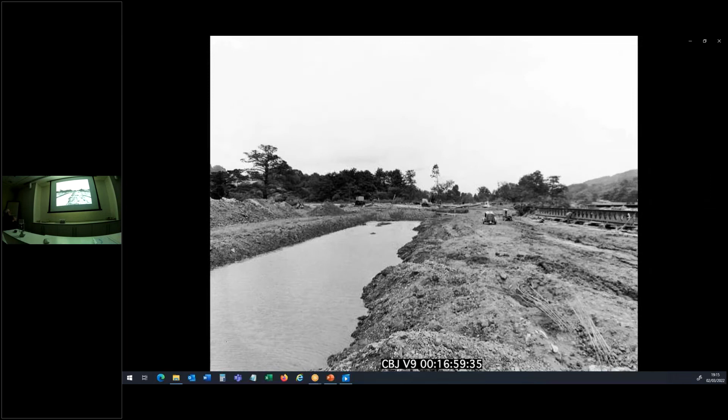A trackscavator removed the sheet piles from under the bridges, and where the channel curved round under the new bridge, the sides and bottom were lined with stone pitching to prevent scour.

On the left bank, alongside the railway, a sheet-piled wall was constructed in stages to retain the new embankment and track where the old bridge was to be filled in. 6-inch pumps running 24 hours a day kept the excavations dry.

When the old channels were pumped out before they were filled in, most of the fish left stranded in the final half-metre or so of water were returned to the river. However, fresh salmon appeared on the menus of a number of local restaurants that week in 1966.

Meanwhile, two accommodation bridges were constructed, one to cross the Mill Leat, the other to cross the new balancing channel below the flap valve sluice wall. The bridge over the balancing channel was fitted with brackets on the parapets for diverted water mains, and the sluice wall below it incorporated flap valves to prevent backflow into the waterworks turbine outlets.

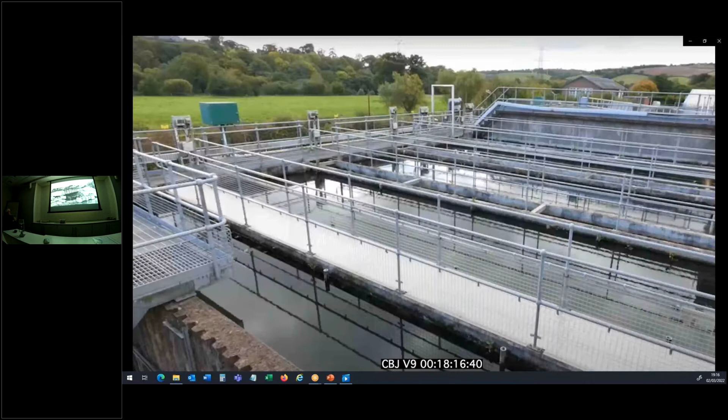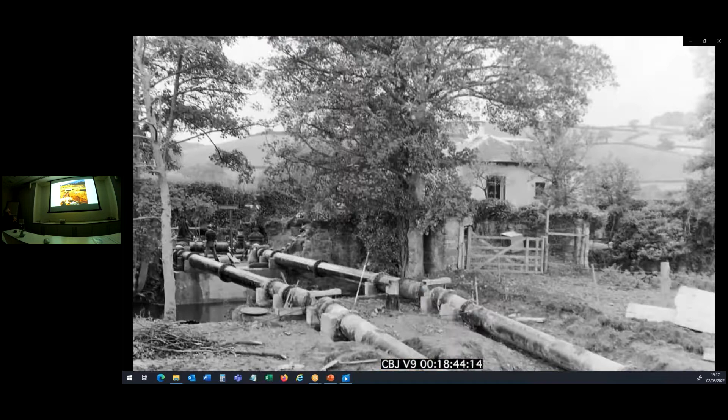Two 450mm diameter water mains from the waterworks ran underground southwestwards to the Crediton Road. For much of their length they followed the line of the new River Exe channel, so 500 metres of replacement cast iron mains had to be laid on a new alignment from near the new flap valve sluice wall to the Crediton Road. Where they went under the railway, a pipe culvert was built between the redundant piers of Bridge 535, and a new pipe crossing was provided spanning the balancing channel adjacent to the road.

In addition to the material excavated from the new river channels, an extra 230,000 cubic metres of fill were imported. Temporary Bailey bridges were erected for earth-moving vehicles whilst filling in the old channels and to provide access for demolishing the old ex-railway bridge. The Brunel upstream culvert under the mainline embankment was extended with a concrete box structure cast in situ between the casings which had supported the old bridge.

The old channel was then filled in and restored to ground level. The embankment under the down half of the ex-railway bridge had been created during construction of the sheet pile wall.

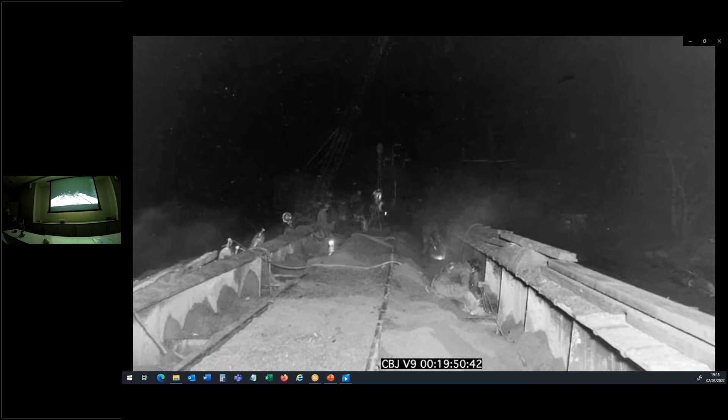This was done by discharging material and stone dust through the bridge deck from 40-ton hopper wagons and side tippers during night track closures in late 1966. The fill was topped up to formation level and the rails and longitudinal bearers removed and replaced with plain line track.

Later, the main girders were cut into sections and loaded away by rail, leaving the cross girders buried in the embankment. On completion of the work, the contractor's compound was dismantled and the field reinstated.

The remainder of the contractor's siding and access road was removed and Bridge 537 demolished and filled in, enabling double track to be reinstated north of the new single to double line connection, although the line has since been singled throughout. Finally, the ground frame at Upton Pyne was removed and control transferred to Cowley Bridge Junction signal box.

From here, you can see approximately where it's alleged that a temporary station was built, probably just a simple platform with some red carpet on, for Queen Victoria when she visited Lord Iddesleigh, who was then her Chancellor of the Exchequer, and lived at Pynes House. The bridge carries Pynes Hill up towards Upton Pyne over the Crediton line, and the station would have been just to the right of that pine tree trunk.

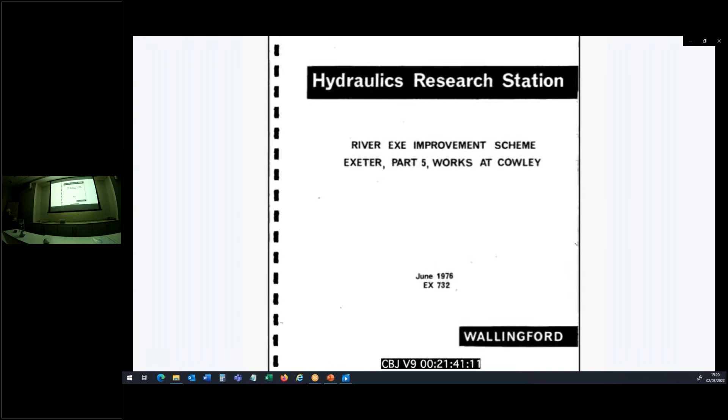Flooding continued to affect the Cowley area, and in 1972 the Devon River Authority engaged the Hydraulics Research Station at Wallingford to construct a hydraulic model of Cowley and its environs, examining conditions on the floodplain from Cowley down to Exwick Weir. In June 1976, Hydraulics Research produced a report for the South West Water Authority, successors to the Devon River Authority, proposing further alterations to the river channels.

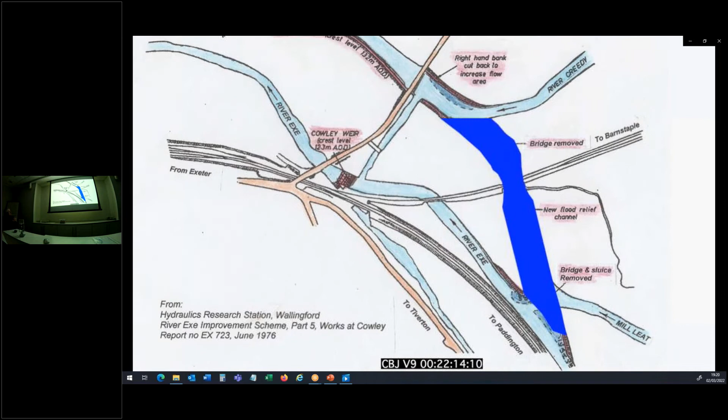It recommended diverting the River Exe, during flood conditions, into the River Creedy and through Cowley Bridge, which could accommodate much larger flows than the bridge next to the railway at the junction. A flood channel approximately 40 metres wide would be created by widening the Mill Leat from where the flap valve channel joined the Exe to where the Mill Leat flowed into the Creedy, taking advantage of the extra wide twin spans of the 1967 Barnstaple Line Railway Bridge.

Other flood protection proposals were not adopted, but in 1979 land was purchased and the Mill Leat widening was carried out. Essential work involved demolishing the 1967 flap valve channel sluice wall and the accommodation bridges, which were replaced by two new bridges over the Mill Leat next to the Barnstaple Line Railway Bridge.

The outlet from the turbines at the waterworks used to come out into this channel I'm standing on, which was the Mill Leat tail race, and the bridge and pipe crossing built here was a replacement for what we built in 1966. There was also an accommodation bridge carrying the diverted water mains, which has in turn been replaced by the accommodation bridge on the east side of the Barnstaple line. The turbines are no longer used, so the tail race is no longer necessary, and it's pretty full of vegetation.

Over 40 years on, the rich soil of the valley has returned to agricultural production, and the trees have grown again along the river banks, with no sign of the disruption caused by the construction work carried out in the 1960s and 1970s.

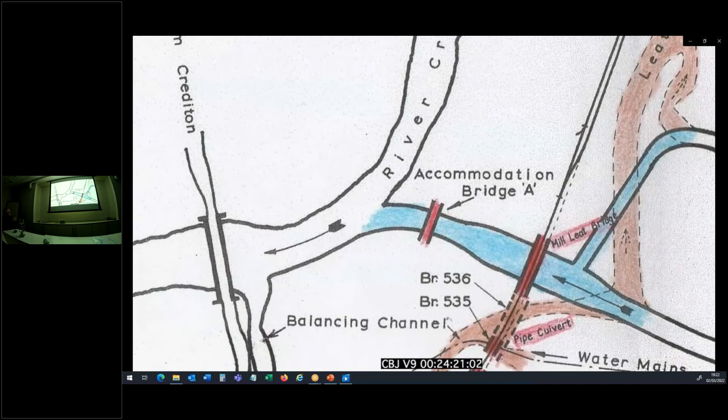This is one of the new accommodation bridges, built after 1978 when the Mill Leat was widened to accommodate greater flood flows. There's one built on each side of the Barnstaple Line Bridge, over here to my right. Downstream, the old accommodation bridge had to be demolished because it was much too narrow for the widened Mill Leat, and this was the replacement. Looking upstream, you can see towards the confluence with the course of the River Exe next to the Great Western Main Line.

This is Stafford Bridge, not Stafford's Bridge, about a mile upstream from Cowley Bridge Junction, and it is really where the flooding problems originate.

Mark Phillips was the area civil engineer at Exeter during the 1990s and was often involved with issues on the floodplain. Stafford Bridge here was a frequent trouble spot for us, because when the River Exe reached high flood levels, there was a concern it might damage the bridge, and we did have to close the line on occasion, maybe once or twice a year.

So what we did was put a watchman out here, day and night when the river was high. He had a little lineside hut, with instructions to give warning to his supervisor that the line would be closed if the river level came within a couple of inches below the bottom flange of the main girders. That, unfortunately, quite often meant closing the line for a day or two until the river subsided.

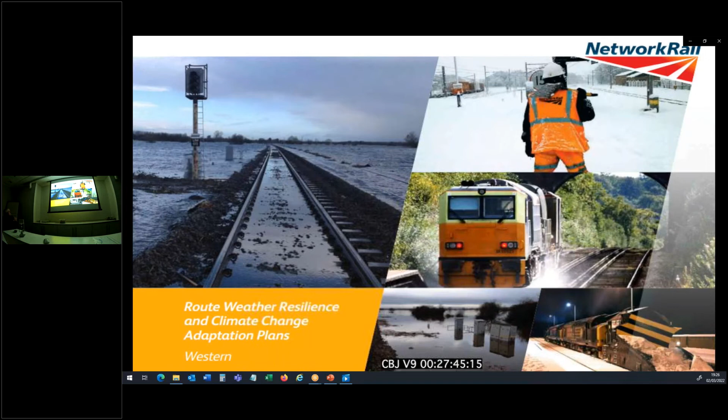The scheme Mark was referring to resulted from Network Rail's 2013 Weather Resilience and Climate Change study, following another serious flood in 2012.

Well, back in 1980, an attempt was made to improve the flow of water and to get rid of it from this side of the railway line. So these fairly large diameter pipes were put in, but unfortunately they were found to be not sufficient to deal with the increasing amounts of floodwaters that were being experienced.

Contractor Amco Giffen and their consultant Ove Arup were appointed to design and construct 2 large culverts through the embankment, upstream of Cowley Bridge Junction.

Well, these are the new flood culverts which were installed in 2018, after a study was done by Network Rail following the 2012 disastrous floods that washed out Cowley Bridge Junction completely.

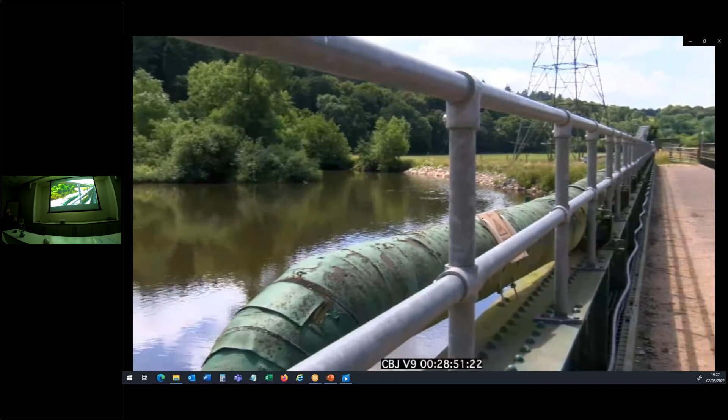And of course the idea is to release the water that comes over the flood banks at Stafford Bridge and finishes up on the wrong side of the railway, on the east side, flows down parallel with the railway, finishes up at Cowley Bridge Junction, and has nowhere else to go.

So having done an in-depth study of the hydrographics of this area, this was the size of culvert that the design engineers decided to install.

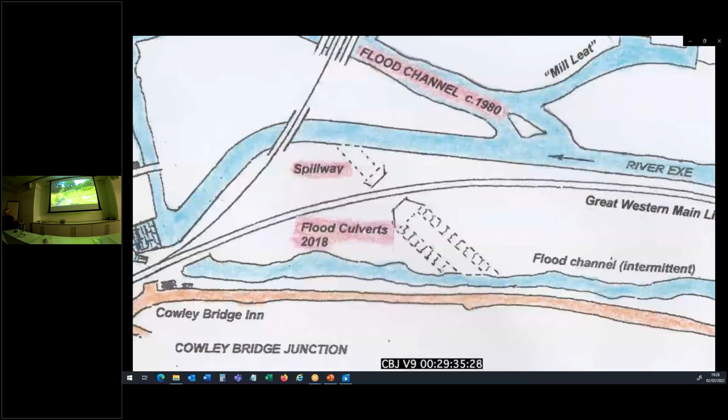Well, this is the outlet end of the new culverts, and they discharge onto a rock mattress which forms the bed of the spillway to stop erosion, and the flood waters then discharge down into the River Exe, which is just beyond that whole load of grass and reeds and bulrushes, by the look of it, just on the east side of the new Barnstaple Line railway bridge that was built in 1966.

On the day we were filming, this was quite slippery.

So, as you'll be able to see, the culvert is formed of a load of precast units, all brought in from Shay Murtagh in County Westmeath, and dropped into a gap that was created in the railway embankment during a 75-hour closure of the railway, and all bonded together to form a dual culvert.

The wing walls were actually built before the culverts were built, so they were already in place before we had to close the line. The inlet to the culvert from the ground above was specifically designed hydraulically to ensure it had sufficient capacity to direct the water into the culvert, and to prevent scour, these rock-filled mattresses were placed to stop the ground being scoured away from in front of the apron, and also the banks have been reinforced with grass mattresses to help prevent scour to the sides.

The depression in the field here that I'm standing in was actually the course of the old River Exe, which, before the railway was built, used to curve round, and you could see it in the crop marks as well. It comes round in a curve and right back round to almost exactly where the new culverts were built in 2018.

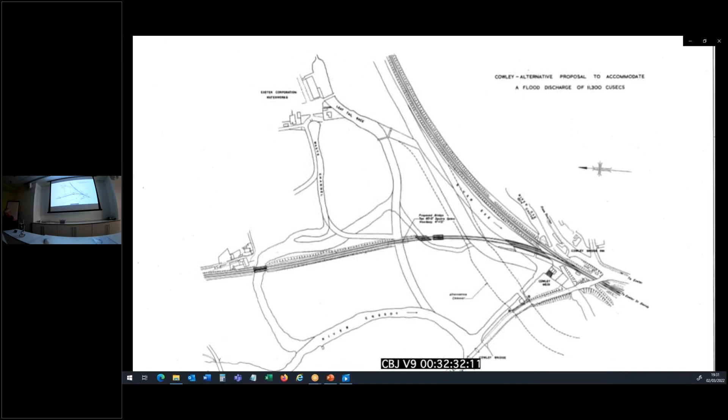When the Bristol and Exeter Railway was built, the River Exe could have been left to continue across the floodplain to Cowley Bridge. Another option suggested in the 1961 report was to reroute it further west through a wider bridge under the Crediton Road to divert floodwaters away from the railway. Whatever the reason for the decision, there remained the problem of water overflowing the floodbanks at Stafford Bridge. This might have been reduced by providing wider openings where the Exe passes from the east to the west side of the track. It is hoped that this will be sufficient to discharge any floodwater that comes down this side of the line. So that's what's been built.

It's really the first piece of engineering which has specifically addressed the flooding problem at Cowley Bridge Junction since 1897, when one of the culverts was put in by the Great Western Railway. And really all the other flood relief works which have been done on the other side of the railway have done nothing to alleviate this problem as part of the city flood relief scheme to divert water away. We wait to see if it's going to work. So we watch out for the next major flood.

A crossing point of the River Exe at Cowley has probably existed since Roman times. A bridge was first recorded in 1286, presumably with a causeway across the floodplain to raise the road above the flood level. The bridge was finally destroyed by floods in 1810. The present arch bridge has 3 spans totalling 47 metres, reportedly built in less than a year, opening on the 5th of October 1814, and has survived regular flooding for over a century. Only time will tell how the latest flood relief works perform with the predicted climate change and resulting increases in rainfall and river flows.